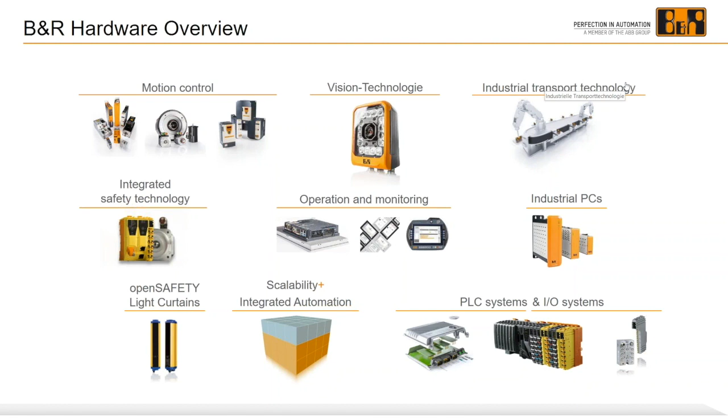So first, Mike will start off by discussing a few key performance indicators that we see manufacturers using to evaluate their machine performance. And then we'll give an explanation of the ACOPOStrak system and its products, features, and use cases.

Thanks, Tyler. So like you just mentioned, generally speaking, the decision-making process for a manufacturing plant boils down to 4 main KPIs. There may be some other things that are important, but really the main drivers are boiled down to those 4. So in the development of ACOPOStrak from B&R, their goal was to specifically address these 4 KPIs. So let's have a look at those.

First, we have return on investment. So return on investment is used to gauge the profitability of a given investment in manufacturing assets. When you make a substantial investment, you want to know how long it's going to take to get that money back and actually start making profit from the investment. Most important factor here, aside from purchasing costs, is the productivity of the asset.

Second is availability. As one of the 3 components that make up overall equipment effectiveness, availability measures the percentage of planned production time that an asset is actually capable of operation. If a machine is not running, it could be due to a planned stop, such as maintenance or changeover, or an unplanned stop, such as a jam or breakdown.

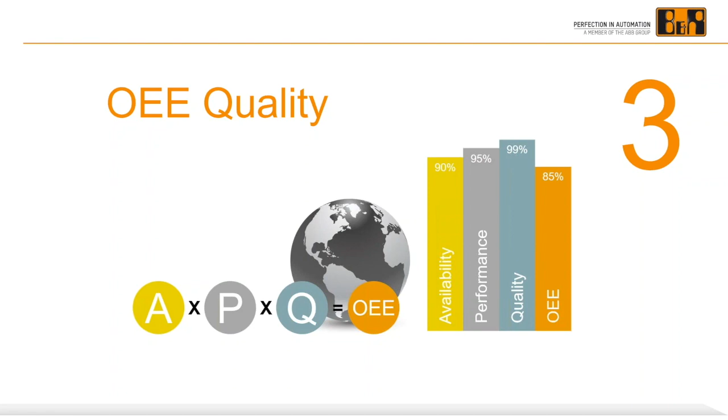Lastly, our final KPI is time to market. So time to market has two dimensions. First, it applies to machine builders and system integrators. How long does it take them to bring a new generation of machine to market?

Second, it applies to producers. How long does it take to produce a newly conceived product on an existing production line? Time to market is of particular significance for short-lived products and seasonal goods, such as holiday-themed products or products timed for special events like the Olympics or Super Bowl.

Cool. Thanks for getting us started there, Mike.

I'll start by going into the basics of the ACOPOStrak system. So it's an intelligent transport system based on long stator linear motor technology, and it offers independent control of a variable number of shuttles, which are held on the track by permanent magnets. And those shuttles correspond to the rotor of a conventional rotary servo motor.

So if you're thinking about this like a normal servo, the rotor, what spins, is the shuttle, the stator is the actual track. And other components of the system are mechanical guides, position sensors, signal and power electronics, and last but not least, some software. And we'll talk about those different pieces in a little bit more detail later.

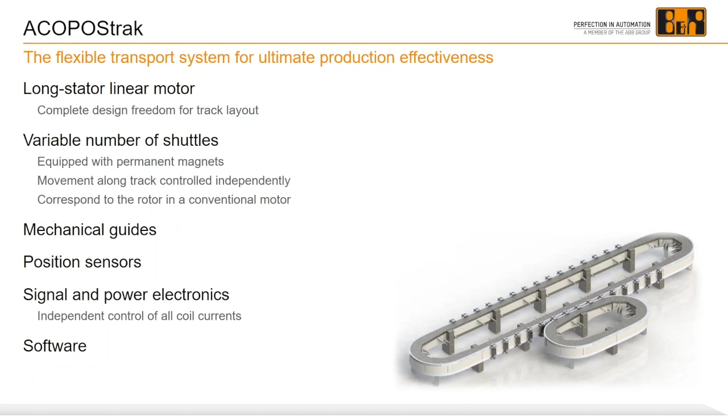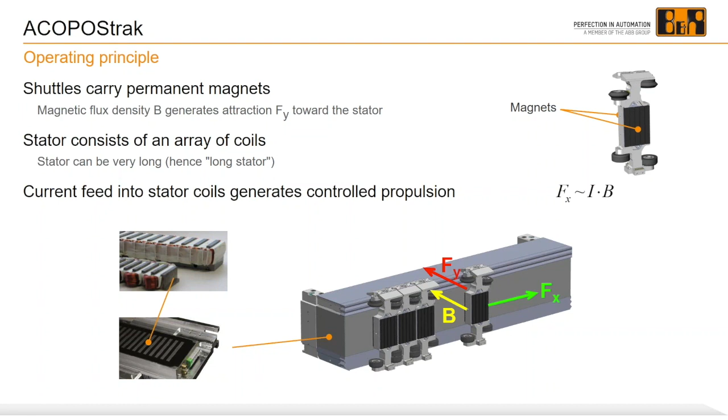And the operating principle is actually pretty simple and straightforward. The shuttles carry permanent magnets, like I mentioned, and that creates an attraction force towards the motor stator. And the stator itself consists of an array of coils. The current fed into the stator coils generates a controlled propulsion force. And with this, you can move the shuttles in either direction quickly, accurately, and independently.

So now that we've talked through the basics, let's get into some of the key features of the ACOPOStrak system. And the first major feature is the track's design flexibility. So by arranging 3 basic track segments on a standard grid, it's about 660 by 660 or a little over 2 foot square, the ACOPOStrak can morph into almost any shape. So track segments can be closed or open and can branch freely on the grid. And this really allows you to design the track to match the needs of the process and not the other way around. This is a pretty big benefit.

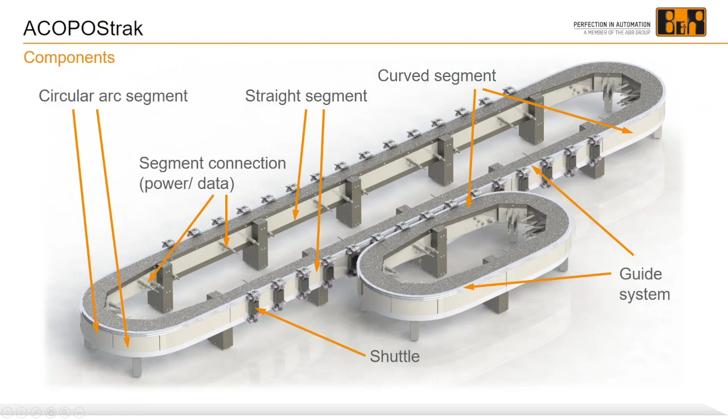So there are 3 types of track segments. We have the straight segments, we have curved segments, and we have circular arc segments. You can also see there's some connectors for power and data communication between the different segments of track, as well as the shuttles. And of course, a guide rail system for those shuttles to ride on. So now that we talked a little bit about that, let's dive into the segments.

Each track segment has a height of about 85 millimeters or 3.5 inches roughly. The straight segment is 80 millimeters wide and 660 millimeters long. And again, that's corresponding to that grid size I mentioned before. The segments are enclosed in welded stainless steel housing, and this allows us to meet the primary packaging or aseptic requirements in industries like food and beverage, chemical, or pharmaceutical. This could be a requirement.

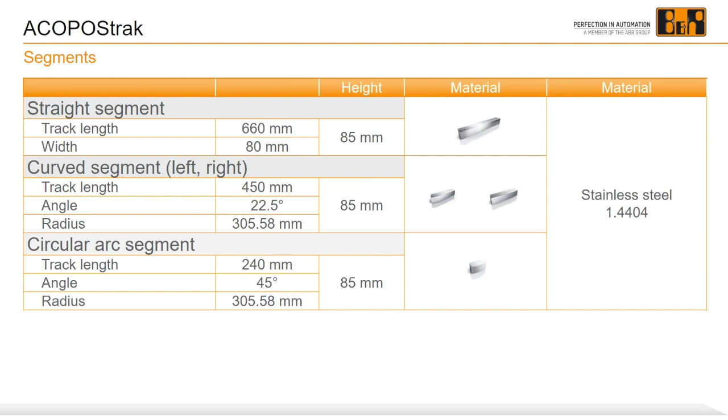So there are also 5 different types of guide rails available. So there's a straight guide rail, 45-degree turn, 90-degree turn, 135 degrees, and 180 degrees. And we have chosen a different base grid for the guides compared to the track segments that we discussed on the previous slides. This was done in order to avoid stacking up manufacturing tolerances of the guide rails. So this helps allow for smooth and accurate control around turns and curves.

And that helps save some space by being able to do some processing on the curve and not have to wait to get to a straight section to get that accuracy and precision that you need. So now that we talked about the segments and the guides, let's talk about how they fit together into a system.

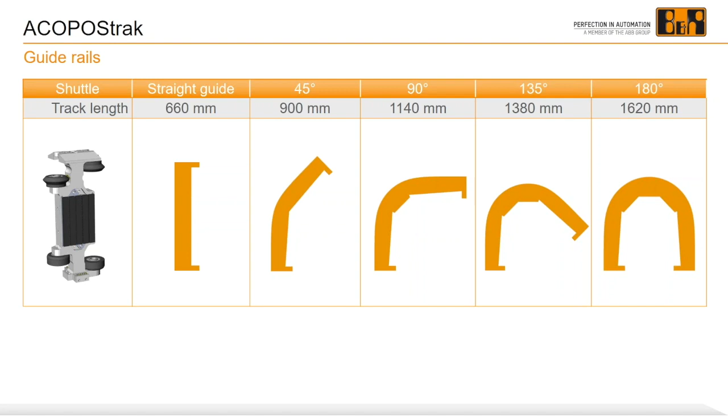So now we can see a fairly large ACOPOStrak layout, which is starting to take advantage of the flexibility and modularity of the system. And one straight track segment or stator fits with one straight guide. And for example, a 45-degree guide rail requires 2 curved track segments, one curved to the left and the other curved to the right. As you can see, a 180-degree guide has one curved segment right, 3 circular arc segments, and 1 curved segment left inside of that guide rail.

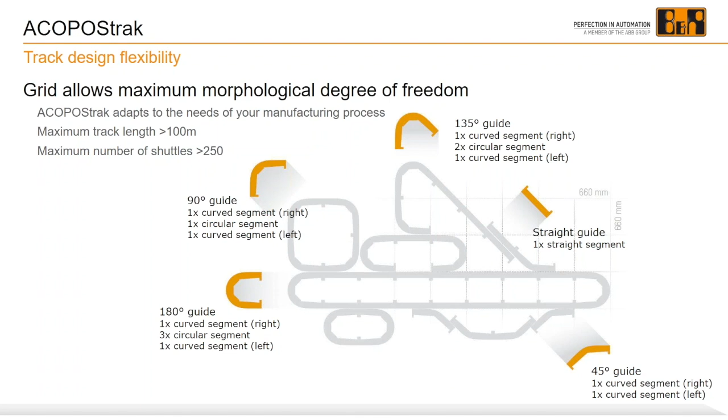And the really powerful thing here is with a single B&R computer, we can have up to 100 meters of track with more than 250 shuttles on that track. And on the same computer, we can host HMI software, integrated vision technology. We can control other devices like servos or even robots. And I think this is really powerful when it comes to creating a truly integrated system with the least amount of latency possible.

And the most important product feature, and I think one that really defines ACOPOStrak best, is the HighSpeed Diverters. I think our R&D team really knocked it out of the park with this one. And the HighSpeed Diverters make it possible to divide and merge product flows at full production speeds. So on the next slide, we'll take a look at how that works.

In short, that's how the diverter is working, but the best thing about this is there's no additional servo or motor or actuator required to do this, and that eliminates a lot of maintenance.

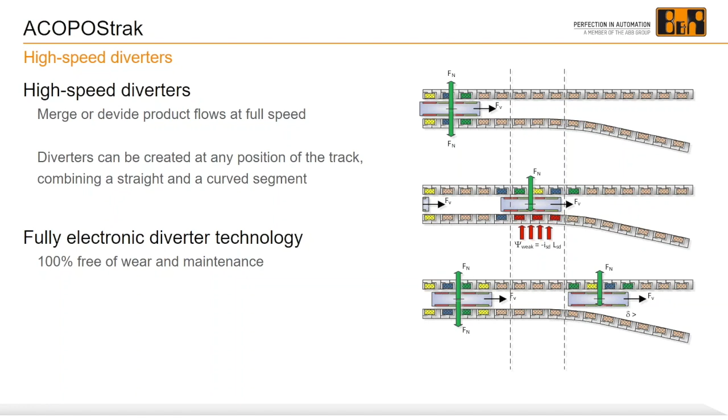The third key product feature is the hot swappable shuttles. They're a true highlight of both the ACOPOStrak system and the SuperTrak system. And ACOPOStrak shuttles, like we said, are held on by just permanent magnetic force alone, and they can be taken off and remounted in a matter of seconds. This is unique compared to how some of the others on the market handle their shuttles.

And in combination with the ACOPOStrak's design flexibility, it's possible to build dedicated pit lanes for service and changeover. And so while shuttles are moving around the track at full production speed on the production lines of the track, shuttles for the next job can be prepared on the pit lane. And in this way, it's possible to achieve 0 downtime changeover, which is boosting the availability component of OEE Mike was talking about earlier.

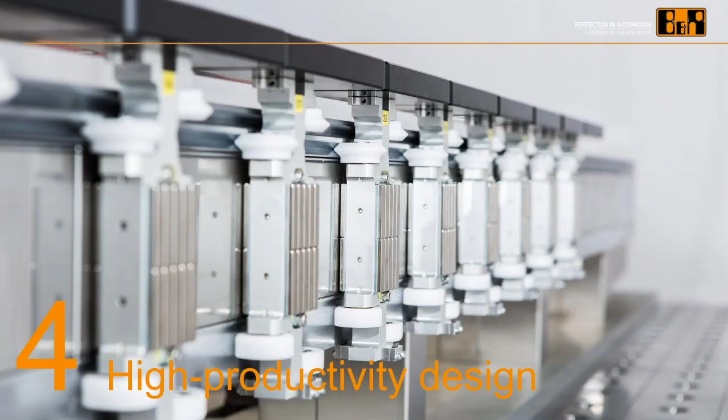ACOPOStrak was also designed to maximize productivity. So the shuttles have a 50mm pitch, and that allows you to produce more per unit time, resulting in higher throughput and helping accelerate that return on investment that we were also talking about. So if you look at the top, you can see these are actually staggered wheels. So you can take these shuttles all the way up next to each other and truly achieve that 50mm pitch to fit more products into the system. Of course, you could also put multiple products per shuttle depending on payload and things like that.

So let's talk a little bit about the technical specifications of the ACOPOStrak. The rated speed is 4 meters per second with a maximum acceleration of 5 Gs at the nominal payload. And ACOPOStrak operates at a 60-volt DC bus voltage and can be mounted really in any orientation, so horizontally, vertically, or really any other inclination.

Each application is uniquely sized appropriately, so these specifications are not hard limits. If your requirements fall outside of these parameters, we still like to discuss that project because you can combine shuttles or decrease speed in order to increase the possible payload, and there's some things we can do on that.

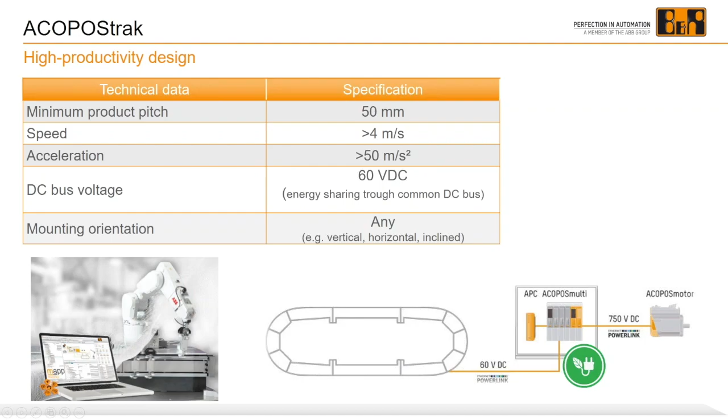We've talked about how the motor segments are tightly welded stainless steel housing, and that's available today with IP65 protection on the entire system. And our next release of the system will be an IP69K version, which is a hygienic and food grade design.

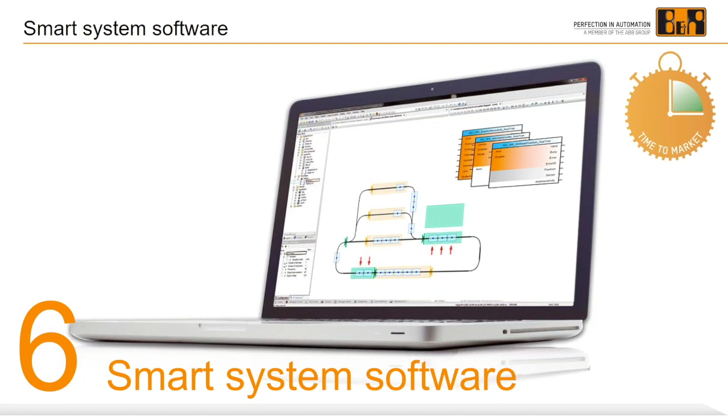And when it comes to accelerating the time to market, one of the secrets is the smart system software that we use to control this track. This is all done within Automation Studio, and there are really three core components of the ACOPOStrak software. One is process-oriented programming. The other one is integrated collision avoidance. And lastly, it's the digital twin capability of the system.

So with process-oriented programming, there's no need to generate motion profiles for each individual shuttle. Especially for larger numbers of shuttles, that would be pretty cumbersome, and it would honestly be pretty time consuming. So instead, you set the rules to define how the shuttle should move on a given piece of track.

And you also don't have to implement collision avoidance in the application software. And that would also be quite complex considering the flexibility and design layout. And so that's built into the firmware as a feature of our software. So all collision avoidance is handled at the firmware level and developed by B&R. Together with these features, that makes engineering pretty fast and pretty efficient.

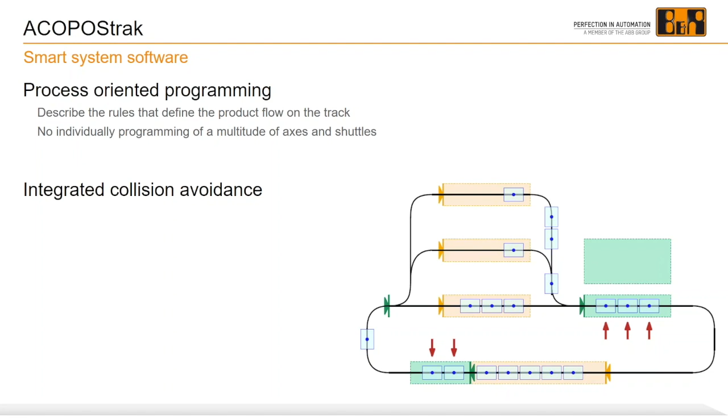It's also pretty straightforward to simulate an ACOPOStrak on your PC. You can configure and program it just like you would the real system. And then you can visualize the movements in 2D or 3D together with the movement of any additional machines. Once you're happy with what you see in the simulation, it takes just a few clicks to run the same application code on a real system.

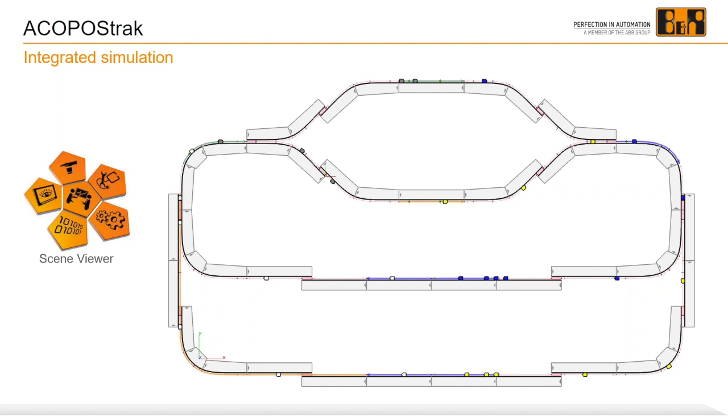And with the ACOPOStrak digital twin technology, you can reduce risk in the project at an early stage and start engineering long before you actually install the real system. And we're always coming out with new tools, since it's a newer technology, to help us get better at creating these digital twins. One of the latest things our R&D team came out with is a mechanical and thermal analysis tool, so we can actually see what kind of response we would get on a real system, even while just running a simulation.

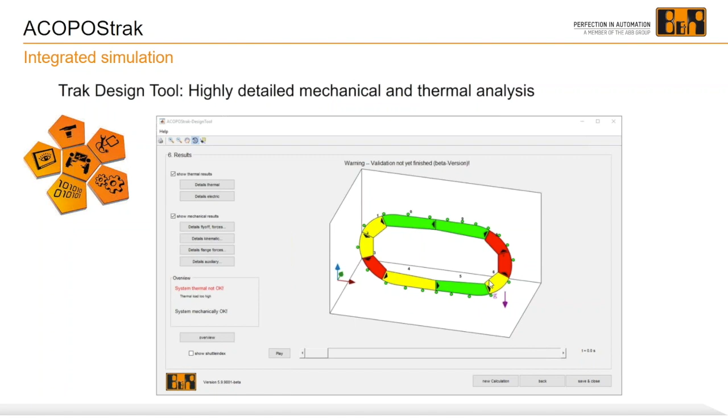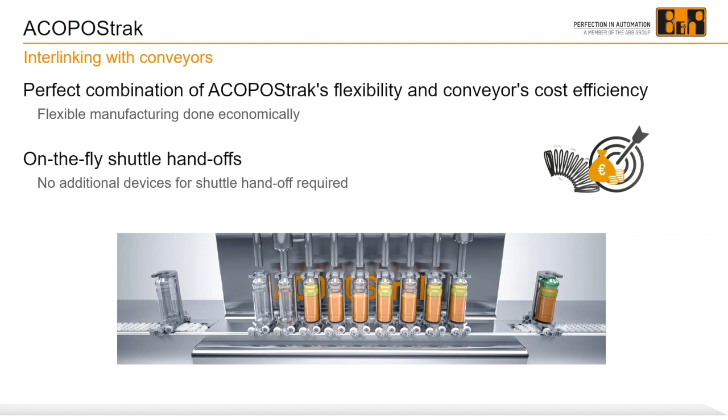So being able to integrate with these FlexLink conveyors and have the intelligence where you need it, and just have a standard conveyor where that is acceptable, really makes this an economic solution, so that different applications where this may not have been feasible in the past can use this technology now. So with that, I'll pass it back to Mike to go through some of the animations and simulations that we put together for this. Thanks, Tyler.

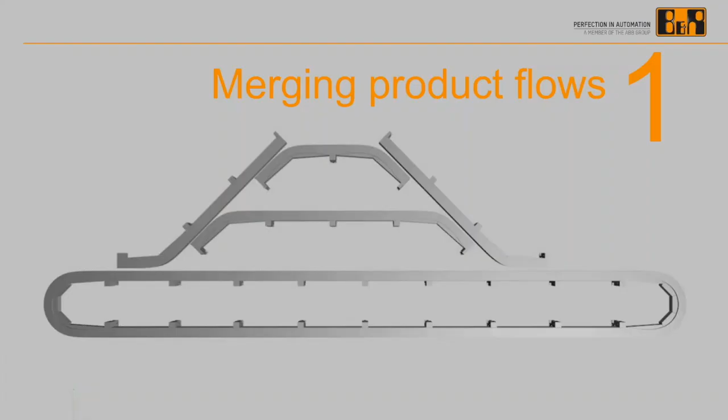So with ACOPOStrak, you can merge product flows responsively and in real time. This lets you do things like compose custom sets or variety packs in batch size 1. Here, ACOPOStrak is the key enabling technology for cost-efficient batch size 1 production without any changeover. It elevates the availability component of OEE to a level that makes mass customized batch size 1 production economically attractive.

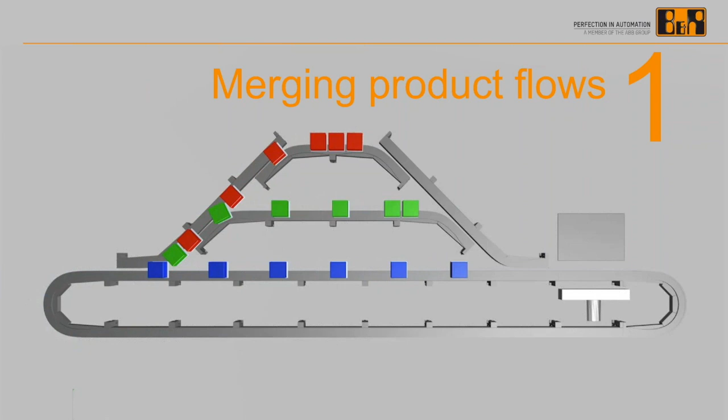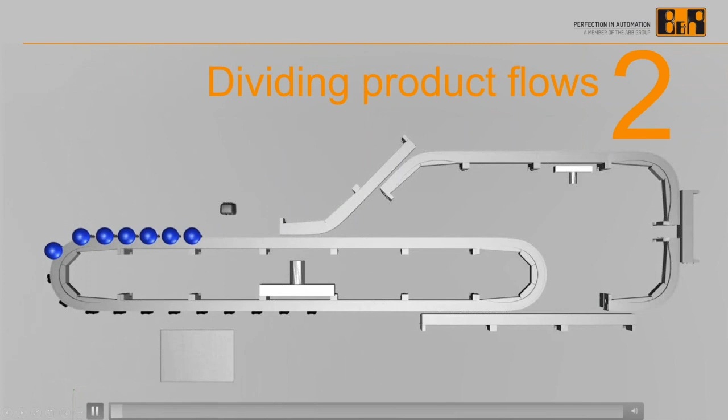There we go. Next, of course, with ACOPOStrak, you can not only merge product flows, but divide them as well. This allows you to do things like divert defective products on the fly and on a product-by-product basis. Here we see products that start off blue because we do not know if they are good or bad. As product quality is checked using a vision system, they turn green if they pass inspection and red if they fail inspection. The green ones continue straight ahead while the red ones are diverted away.

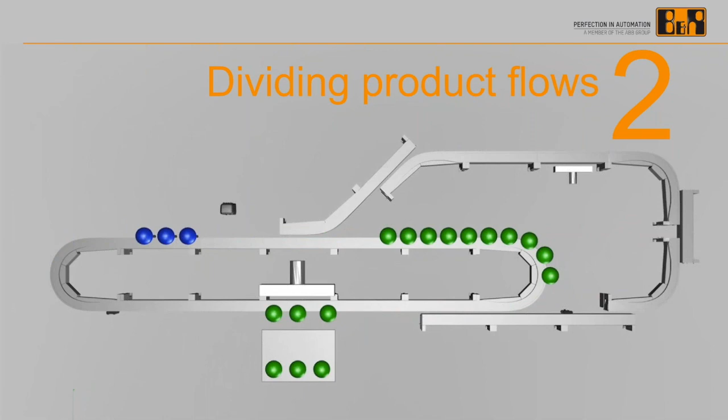ACOPOStrak paves the way for total quality production. So again, this is showing you the blue balls there, and then when they're good, green is going straight. Oop, there's a red one. So it failed and was diverted away.

The flexibility of ACOPOStrak gives us another benefit, which is a new level of fault tolerance. If there's a problem at one processing station, the operator can simply disable that station and the transport system will no longer send products there for processing. The result is an increase in both the availability and quality component of OEE.

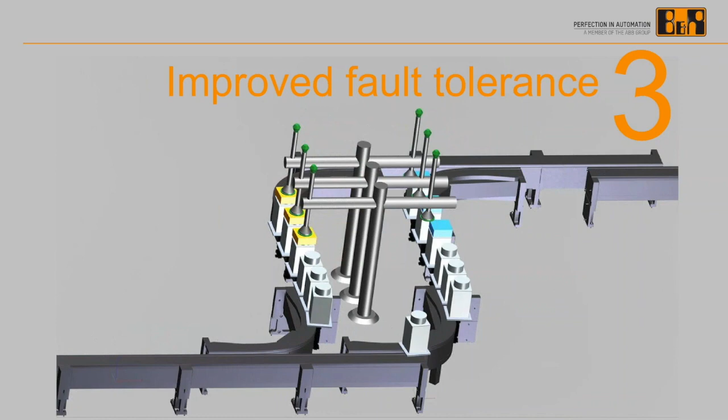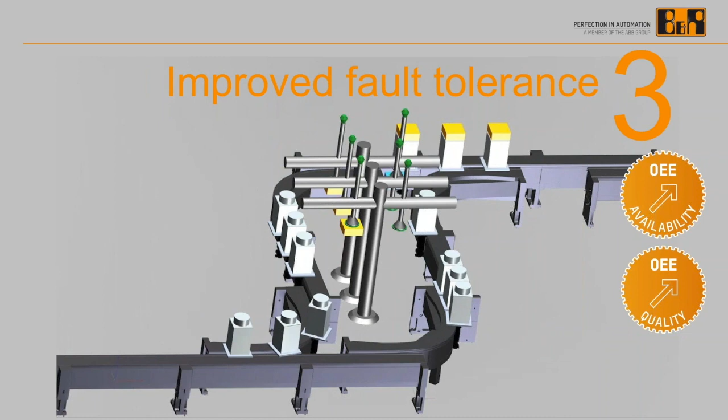So once again, demonstrating, we've got an item in red there on the process. It's had a problem. Now we're no longer sending any product there. Skipping that, now it's recovered and everything's back in full production. Then on the other side, same thing, we had 2 issues. So we continue producing at a lower rate, wait for the system to recover, and now we're back to full production.

ACOPOStrak can increase the productivity of machines and lines, and not just by 5 or 10%, but much more drastically. This is because on conventional fixed indexing transport systems, productivity is limited by the slowest station. With an intelligent track system, we can overcome this limitation and multiply productivity by setting up multiple instances of slower stations. The productivity gain can be substantial and is determined by the difference in processing time between the fastest and the slowest station. With ACOPOStrak as the next generation of intelligent track technology, we can process on parallelized lines enabled with load balancing. This is a real game changer for productivity.

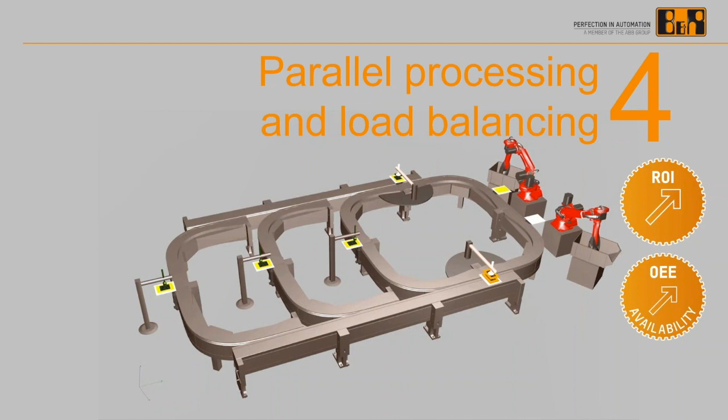When you invest in new manufacturing equipment and are operating in growth markets, chances are really high that you will eventually outgrow your installed capacity. The choices often are buy additional machines or replace the old one. Both are challenging to budgets and productivity. ACOPOStrak makes it easy to build scalable machines. Simply add new ACOPOStrak segments and an additional processing station, and you have upgraded your capacity with minimal investment. This is true investment security and multiplies the return on your investment in production machinery.

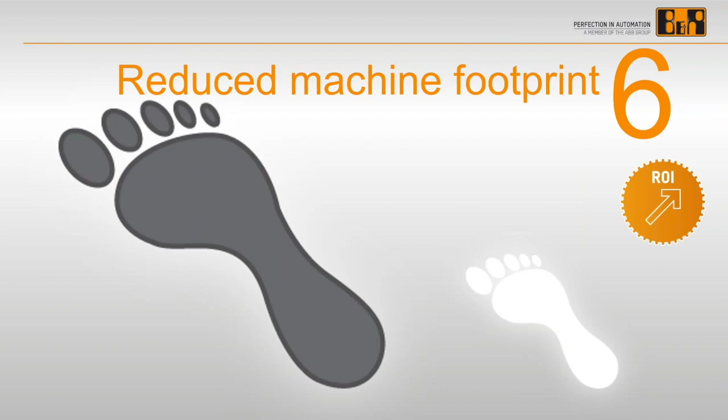So that's the high-level overview of the technology. I think right now we'll open it up to some questions, so feel free to type those in the chat line while we're waiting for some of those to come through.